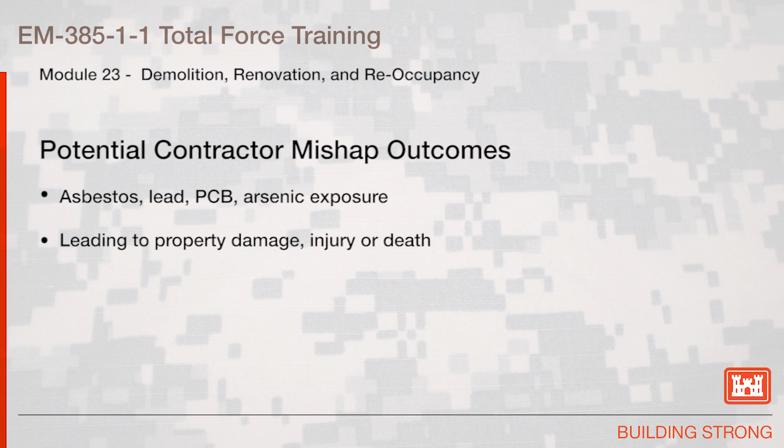Potential contractor mishap outcomes during demolition operations could include fires, explosions, electrical shock, structural collapse, lead, asbestos, PCB, arsenic exposure, all of these leading to property damage, injury, and death.

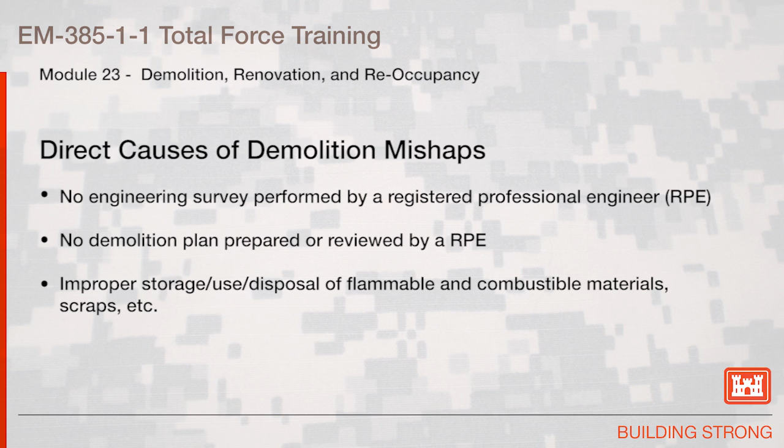Direct causes of demolition mishaps could include no engineering survey performed by a registered professional engineer, no demolition plan prepared or reviewed by a registered professional engineer, improper storage, use, disposal of flammable and combustible materials, scraps, etc. Inadequate type, number, and location of fire extinguishers, welding and cutting near flammables and combustibles.

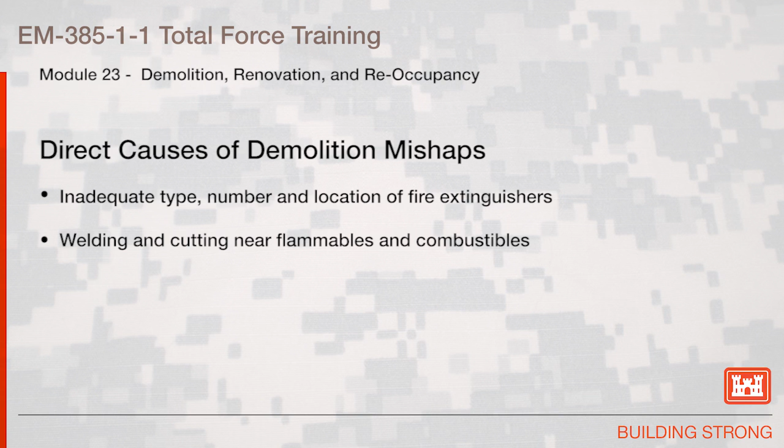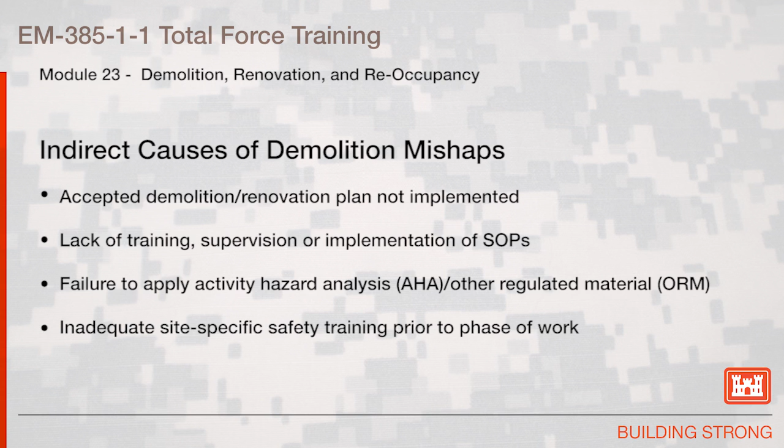Indirect causes of demolition mishaps could include accepted demolition or renovation plan not implemented, lack of training, supervision, or implementation of standard operating procedures, failure to apply activity hazard analysis or operational risk management, inadequate site-specific safety training prior to the phase of work being conducted, regular site safety inspections not being performed, fire extinguishers or other fire protection devices not provided.

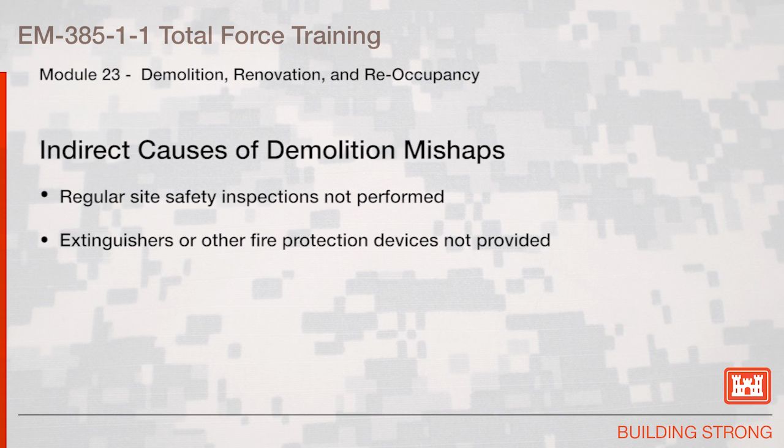Some definitions related to demolition. The process of demolishing or renovating a structure can be completed in several ways. The terms renovation, structural demolition, soft demolition, and mechanical demolition should be understood within the context of this section.

Renovation: the process of remodeling or upgrading an existing structure. This process includes the selective interior demolition and possibly some exterior demolition of a structure as the first step before renovation begins.

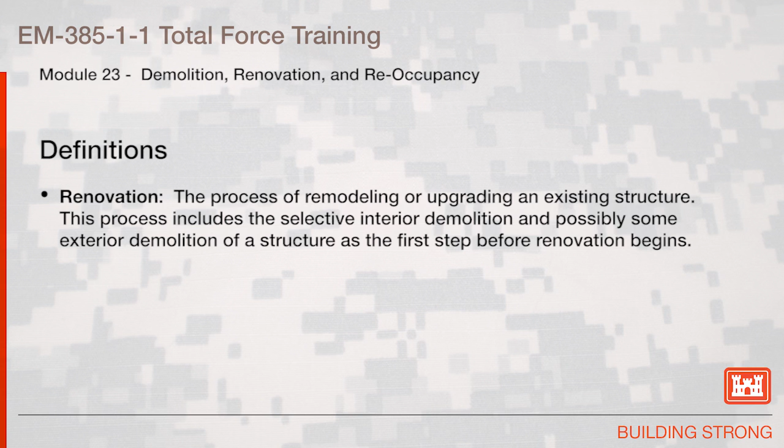Structural demolition: the complete removal of a structure that is not occupied. Structures may include buildings, chimneys, towers, foundations, utilities, bridges, or similar items.

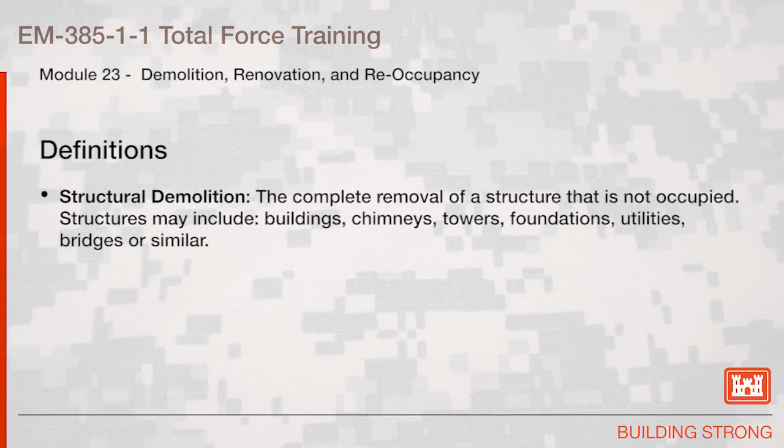Soft demolition: removal of parts or systems of a structure which may include the following: removal of doors, windows, lay-in ceiling tiles, fixtures, interior equipment, lighting, HVAC system components, floor coverings, support systems, and other items deemed appropriate by the state in which the demolition permit is granted. Soft demolition does not include the facility enclosure, curtain walls, roof, slab, or the structural frame.

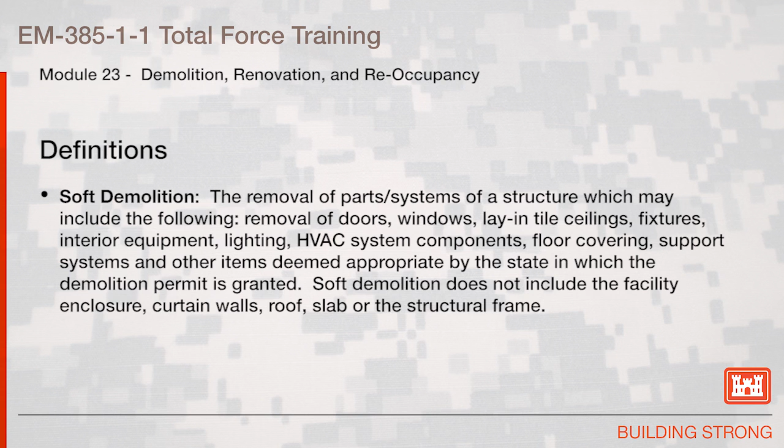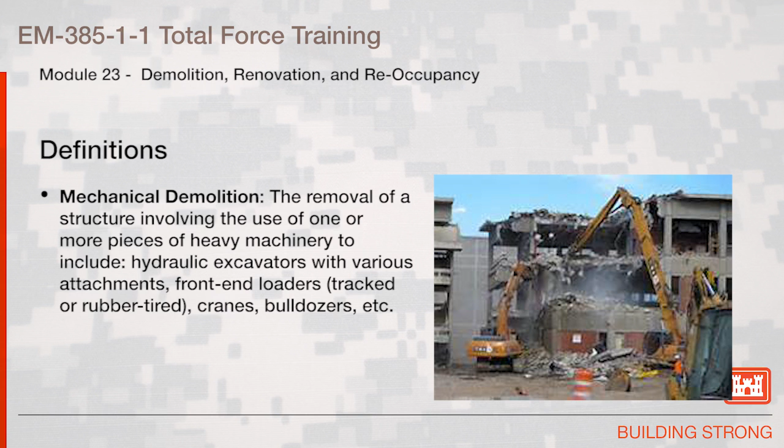Mechanical demolition: removal of structure involving the use of one or more pieces of heavy machinery to include hydraulic excavators with various attachments, front-end loaders, tracked or rubber-tired, cranes, bulldozers, etc.

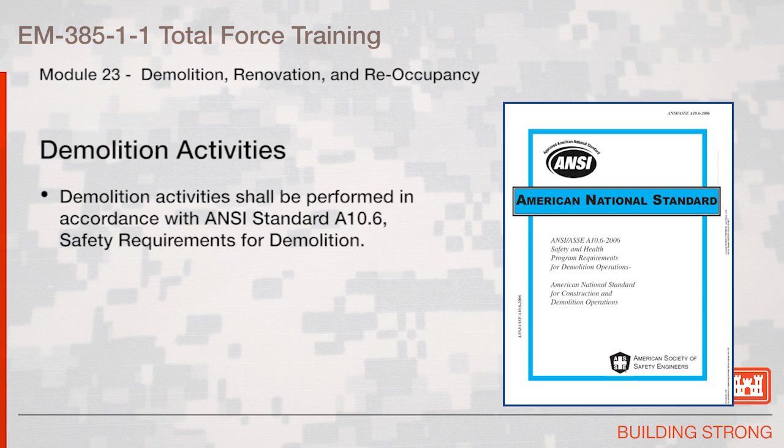Demolition activities shall be performed in accordance with ANSI Standard A10.6, Safety Requirements for Demolition. Demolition Survey: prior to initiating demolition activities, the following survey and plan shall be accomplished.

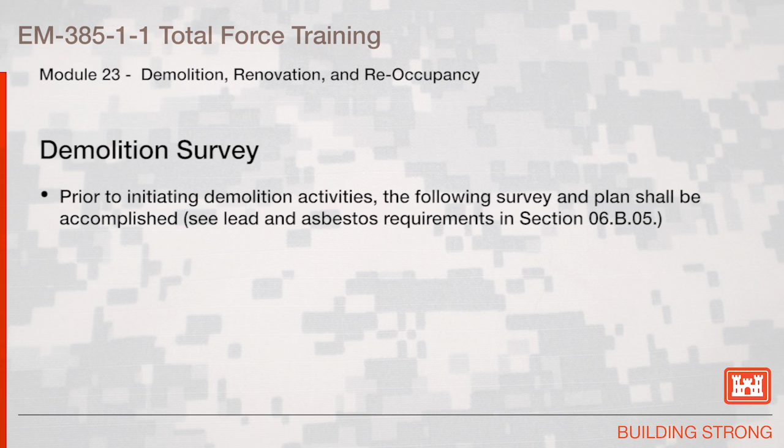See lead and asbestos requirements in section 06.B.05.

Demolition Survey: an engineering survey by a registered professional engineer shall be performed of the structure to determine the structure layout, the condition of the framing, floors, walls, the possibility of unplanned collapse of any portion of the structure. Any adjacent structure where employees or property may be exposed shall be similarly checked, and the existence of other potential or real demolition hazards.

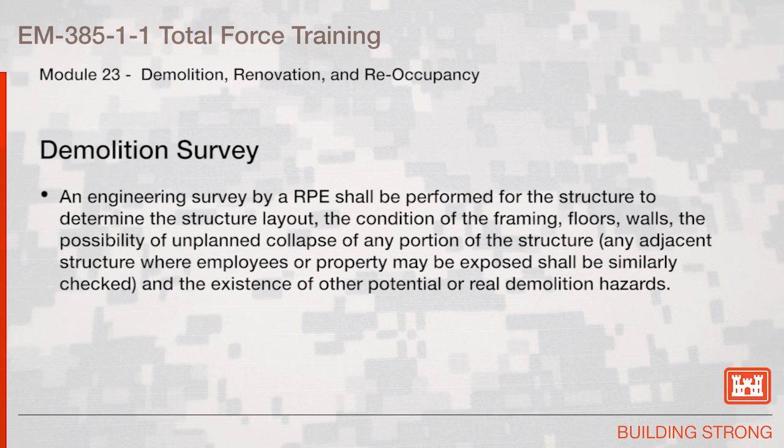The engineering survey is not required for soft demolition or renovation activities as long as no load-bearing structure will be removed or demolished.

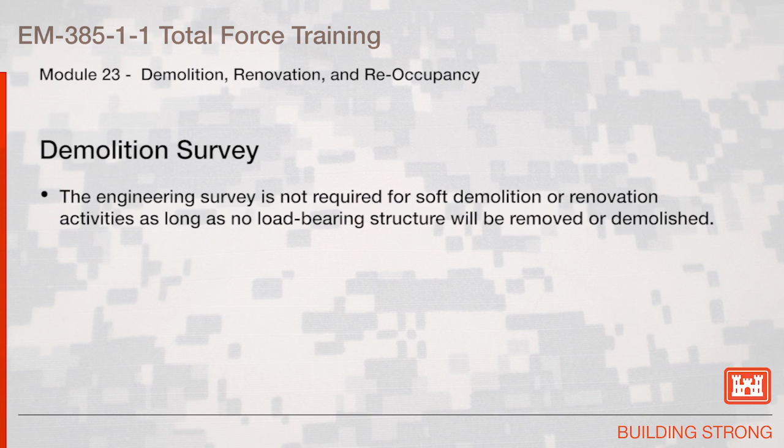Demolition or renovation plan, developed by a registered professional engineer, shall be submitted to the government designated authority. This plan shall be based on the engineering, lead, and asbestos surveys for the safe dismantling and removal of all building components and debris.

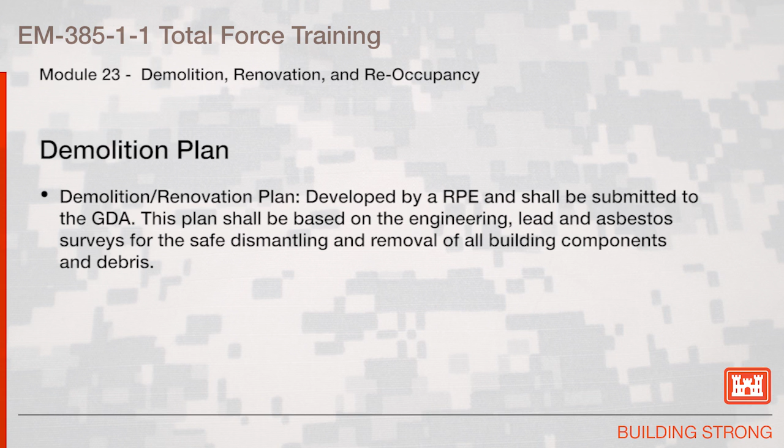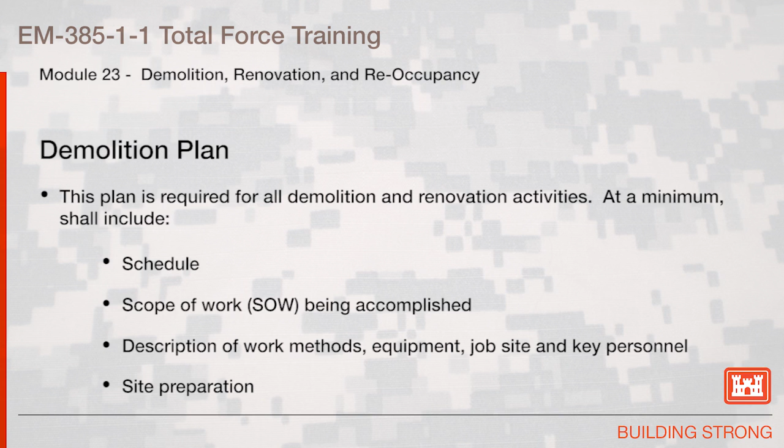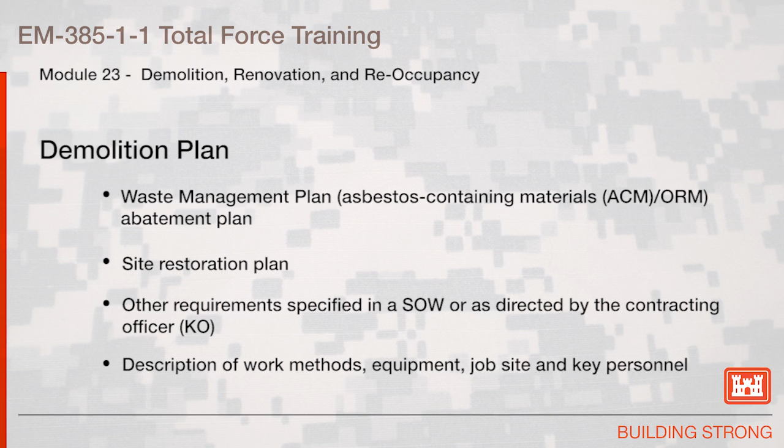This plan is required for all demolition and renovation activities. At a minimum, it shall include the schedule, the scope of work being accomplished, description of work methods, equipment, job site, and key personnel, site preparation, waste management plan, asbestos-containing materials (ACM), other regulated materials (ORM), abatement plan, site restoration plan, and other requirements specified in a statement of work or as directed by the contracting officer.

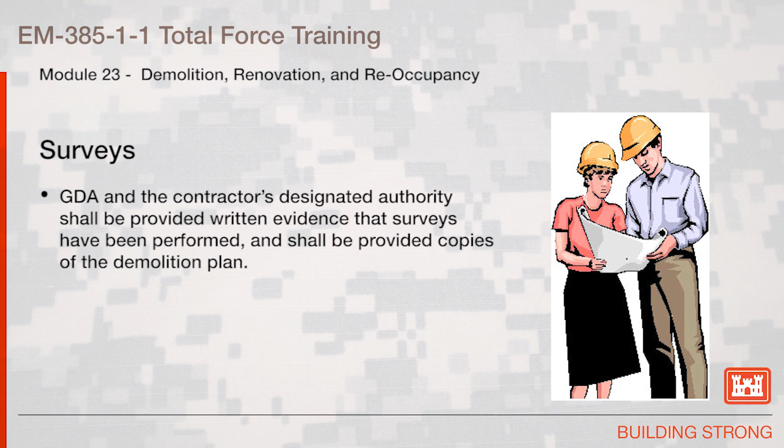Surveys: the government designated authority and the contractor's designated authority shall be provided written evidence that surveys have been performed and shall be provided copies of the demolition plan.

Employee training: all employees engaged in demolition and/or renovation activities shall be instructed in the plan so that they can conduct their work activities in a safe manner.

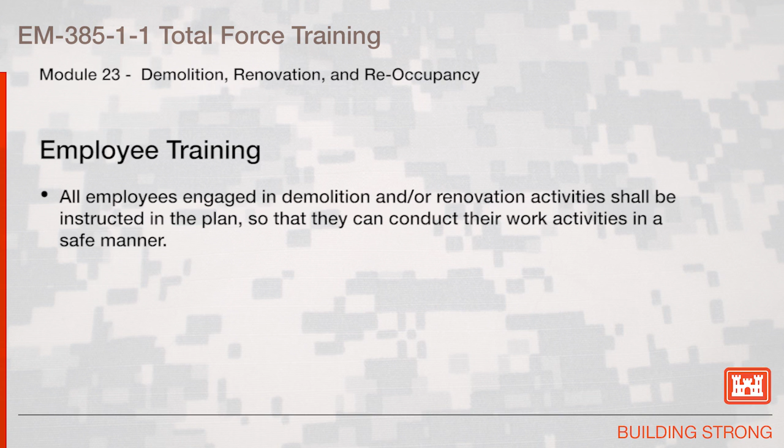Pre-demolition activities: electric, gas, water, steam, sewer, and other service lines affected as a result of the project work shall be shut off, capped, or otherwise controlled inside and outside the building line before demolition is started.

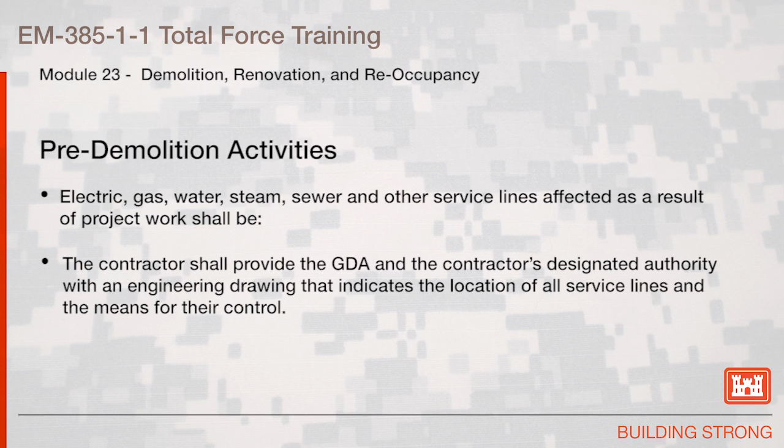Any utility company that is involved shall be notified in advance. The contractor shall provide the GDA and the contractor's designated authority with an engineering drawing that indicates the location of all service lines and the means for their control.

If it is necessary to maintain any power, water, or other utilities during renovation, such lines shall be temporarily relocated and protected.

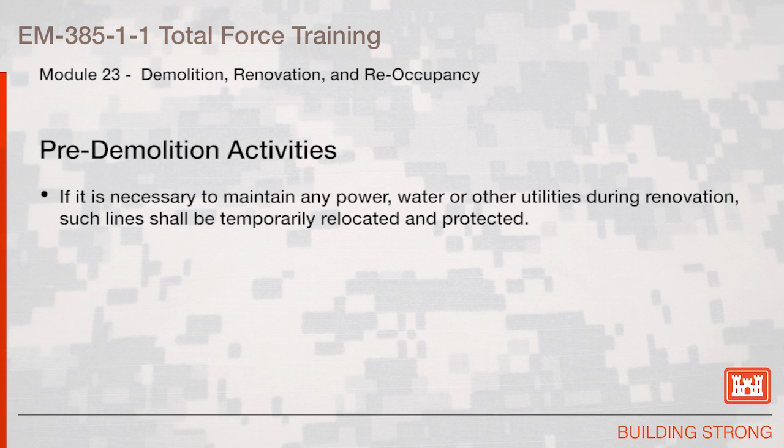It shall be the responsibility of the facility owner to identify and field verify the point or points of disconnection and de-energizing electrical components and electrical service lines.

The contractor must confirm that the disconnection or de-energizing has been performed prior to the start of the demolition process. De-energizing electrical service shall be secured via a lockout method and field verified by the contractor.

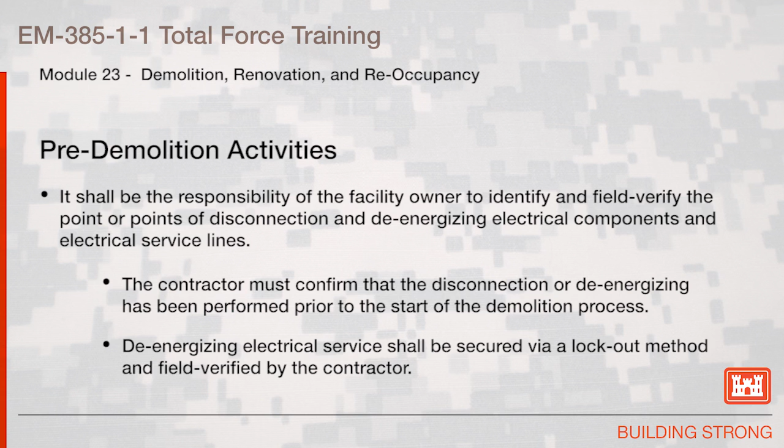If the project includes the abandonment or demolition of existing gas lines, ensure that the existing lines are accurately located and that the procedures and installations for removal or replacement are accomplished in accordance with the applicable sections of 29 CFR 1926.850.

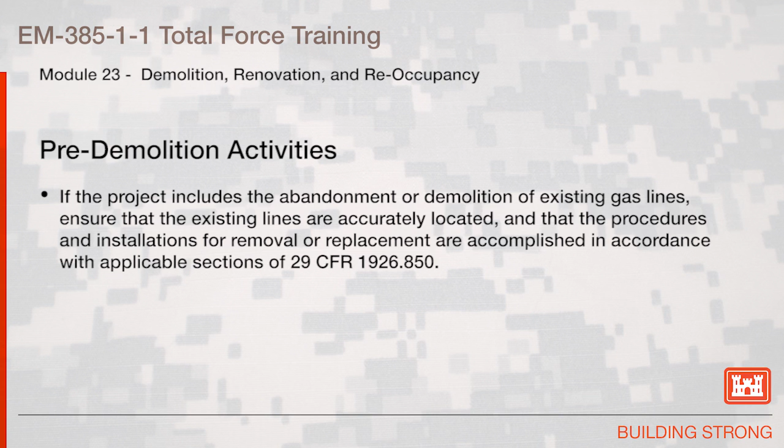If the project includes fire suppression systems, the owner shall provide the GDA confirmation or verification that the chemical fire suppression system has been deactivated and that the chemical has been removed from the system prior to the start of renovation or demolition process.

If the chemical fire suppression system is found to be active after demolition has begun, the contractor shall immediately cease work and notify the government designated authority. The contractor shall take no action to abate or remove the chemical fire suppression system or components.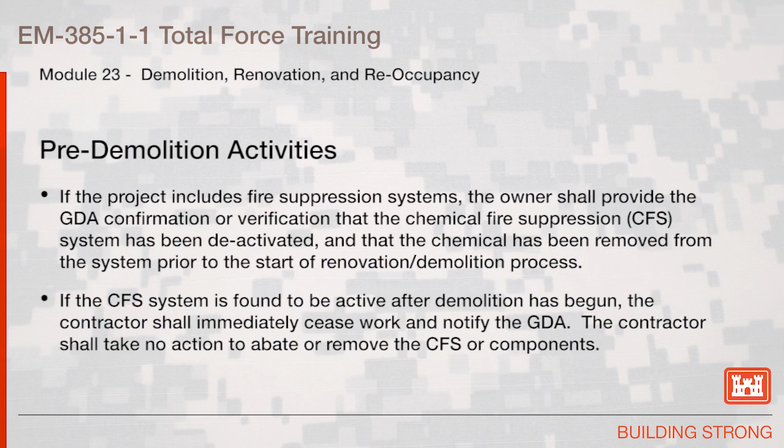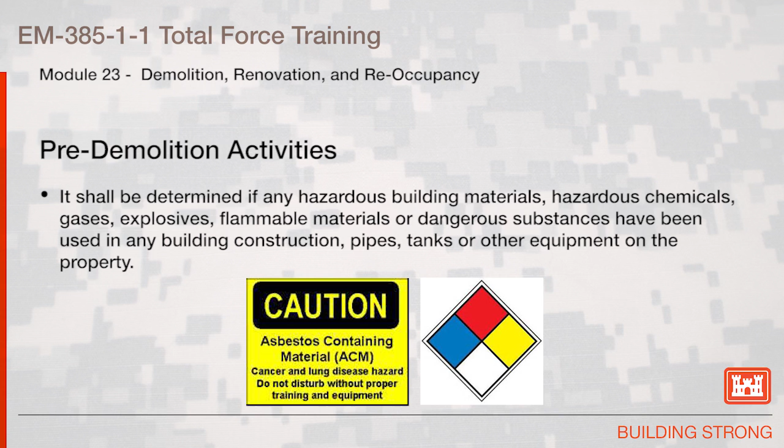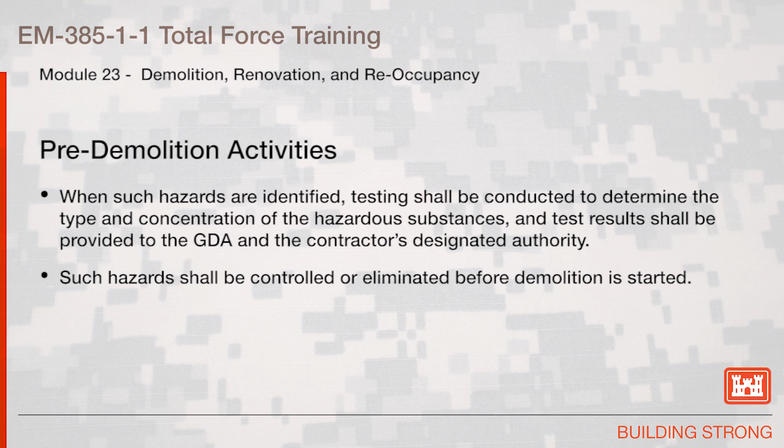It shall be determined if any hazardous building materials, hazardous chemicals, gases, explosives, flammable materials, or dangerous substances have been used in any building construction, pipes, tanks, or other equipment on the property. When such hazards are identified, testing shall be conducted to determine the type and concentration of the hazardous substances, and the test results shall be provided to the GDA and the contractor's designated authority. Such hazards shall be controlled or eliminated before demolition is started.

If hazardous materials or hazmat are found on the project site or location after demolition has begun, the contractor shall immediately cease work and notify the government designated authority. The contractor shall take no action to abate or remove the hazmat without the government designated authority's approval.

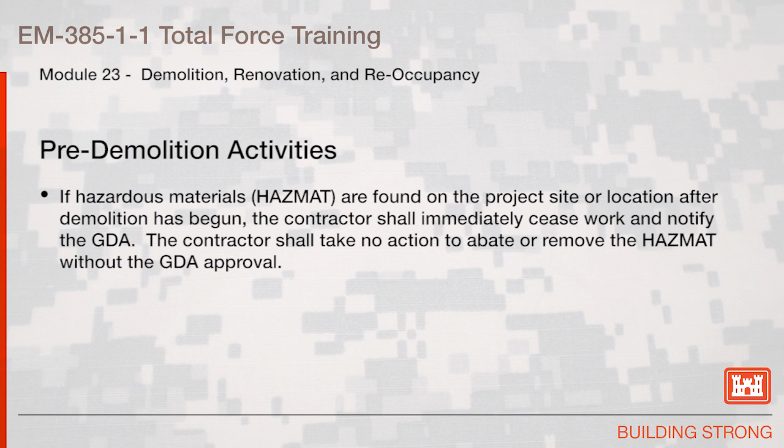All ACM and ORMs shall be removed from structures in accordance with all federal and state laws before renovation or demolition begins. ACM or ORM shall be taken to a controlled landfill or other licensed disposal facility. C and D shall be taken to a general waste landfill, and recyclable materials shall be taken to a recycle yard or retained by the government.

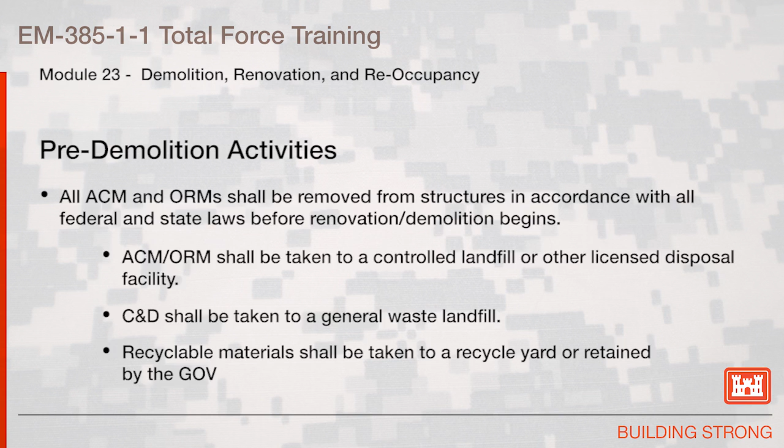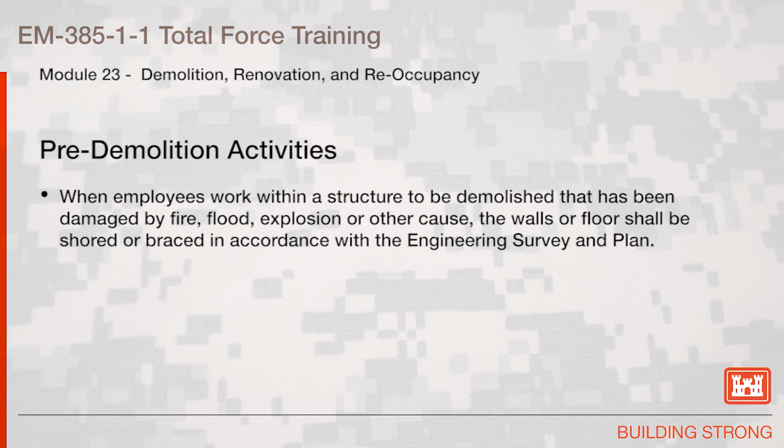When employees work within a structure to be demolished that has been damaged by fire, flood, explosion, or other cause, the walls or floor shall be shored or braced in accordance with the engineering survey and plan. Except for cutting holes in floors for chutes, holes through which to drop materials, preparation of storage spaces, and similar preparatory work, demolition of floors and exterior walls shall begin at the top of the structure and proceed downward.

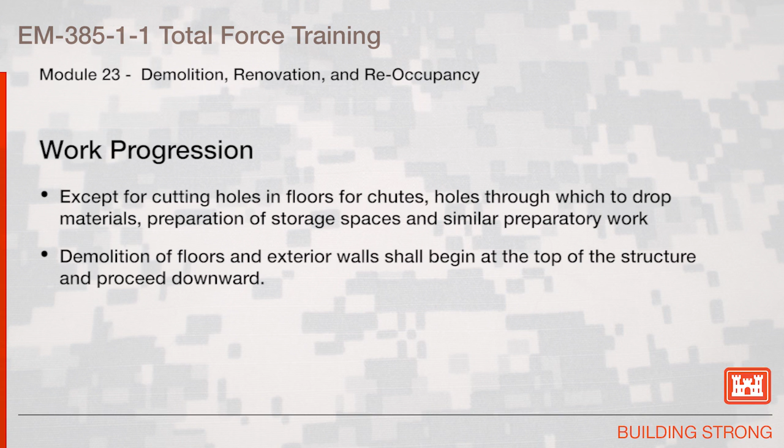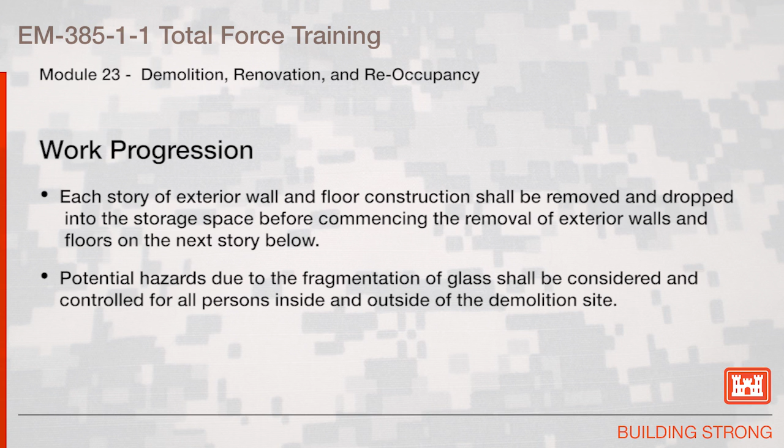Each story of exterior wall and floor construction shall be removed and dropped into the storage space before commencing the removal of exterior walls and floors on the next story below. Potential hazards due to the fragmentation of glass shall be considered and controlled for all persons inside and outside the demolition site.

Mechanical equipment shall not be used on floors or working surfaces unless such floors or surfaces are of sufficient strength to support the imposed load.

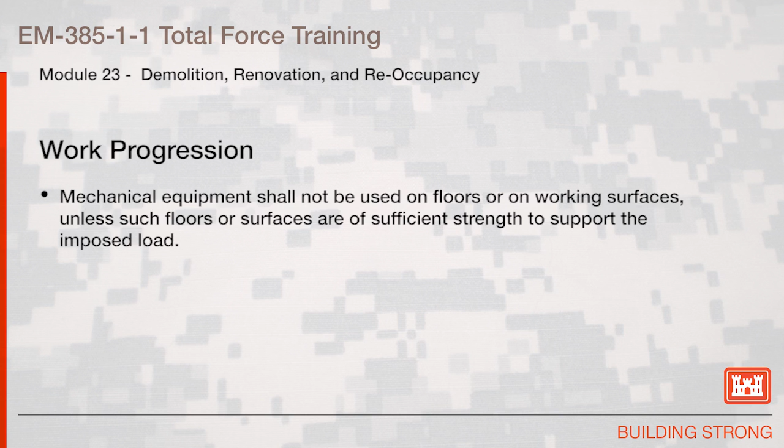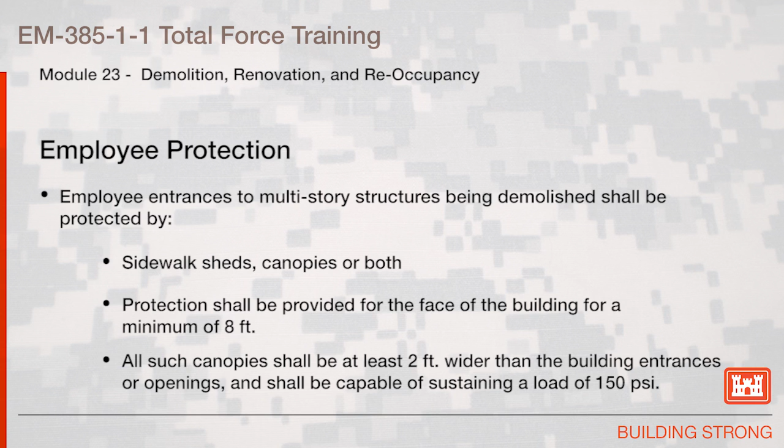Employee protection. Employee entrances to multi-story structures being demolished shall be protected by sidewalk sheds, canopies, or both. Protection shall be provided from the face of the building for a minimum of 8 feet. All such canopies shall be at least 2 feet wider than the building entrances or openings and shall be capable of sustaining a load of 150 pounds per square foot.

Only those stairways, passageways, and ladders designated as a means of access to the structure shall be used. They shall be indicated on the demolition plan. Stairwells shall be covered to protect workers from falling debris at a point no less than 2 floors below the floor on which work is being performed. Access to a floor where work is in progress shall be through a separate, lighted, protected passageway.

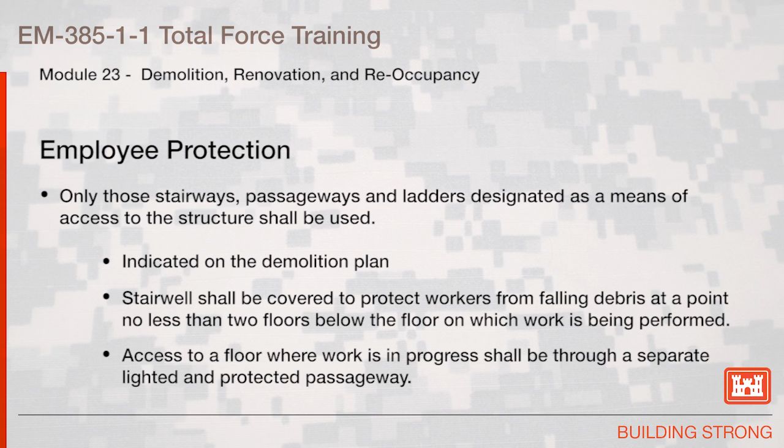Work progression. During demolition, continuing inspections by the competent person shall detect hazards resulting from weakened or deteriorated floors, walls, or loosened material. No employee shall be permitted to work where such hazards exist until they are corrected by shoring, bracing, or other means. The frequency of inspection shall be identified in the blasting or renovation plan.

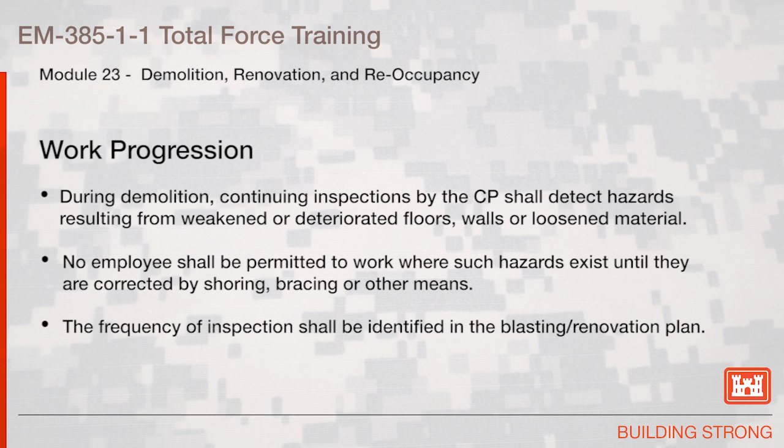Walls or sections of masonry shall not be permitted to fall upon floors of the building in such masses as to exceed the safe carrying capacity of the floor.

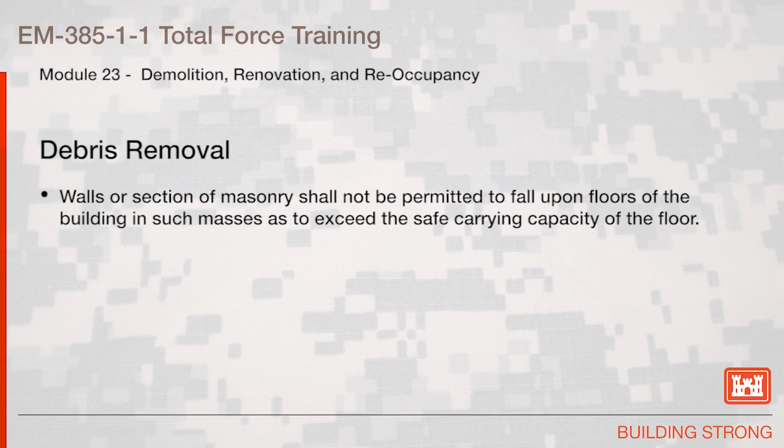Any chute opening into which debris is dumped shall be protected by a guardrail 42 inches above the floor or other surface on which personnel stand to dump the material. Any space between the chute and edge openings in the floor through which it passes shall be covered.

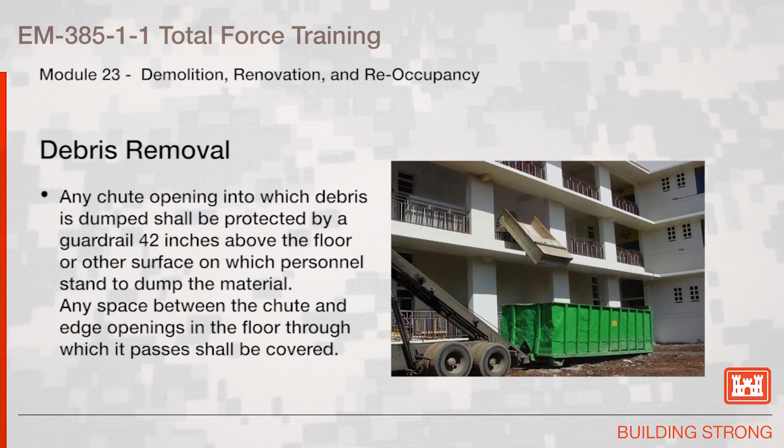When debris is dropped through openings without chutes, the openings and the area onto which the material is dropped shall be enclosed with barricades not less than 42 inches high and not less than 6 feet from the projected edge of the opening above. Signs warning of falling material shall be posted on each floor. Debris removal shall not be permitted in lower areas until debris handling ceases on the floors above.

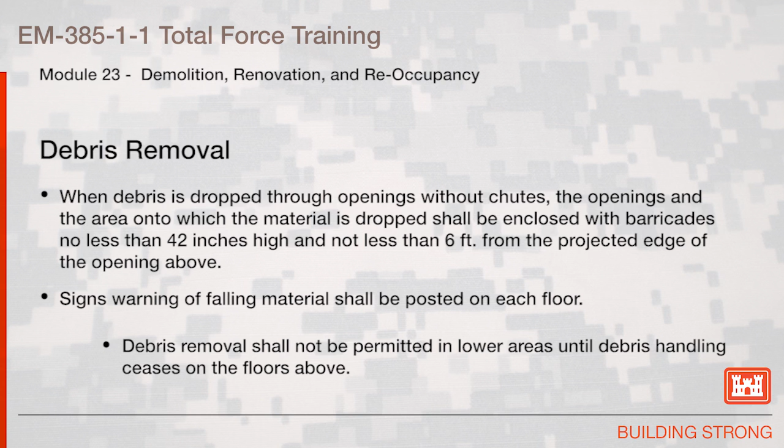All material chutes or sections thereof at an angle of more than 45 degrees from the horizontal shall be enclosed, except for openings equipped with closures at or about the floor level for the insertion of materials. Openings shall not exceed 48 inches in height measured along the wall of the chute. Openings shall be kept closed at all floors below the top floor when not in use.

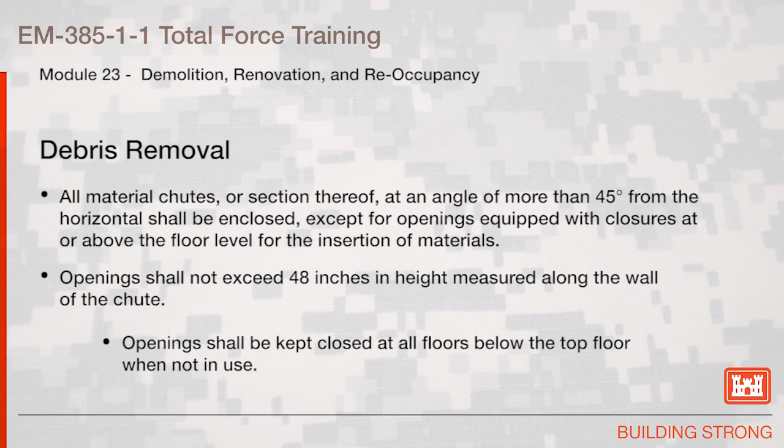A substantial gate shall be installed at each chute at or near the discharge end. A competent employee shall be assigned to control operations of the gate and the backing and loading of trucks. When operations are not in progress, the area surrounding the discharge end of the chute shall be closed.

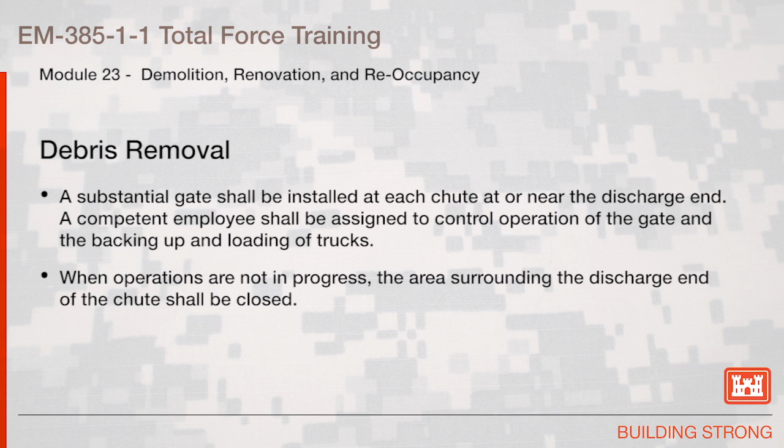Where material is dumped from mechanical equipment or wheelbarrows, a toeboard or bumper not less than 4 inches thick and 6 inches high shall be attached to each chute opening. Chutes shall be designed and constructed of such strength as to eliminate failure due to impact of materials or debris loaded therein. The storage of waste and debris on any floor shall not exceed the allowable floor loads.

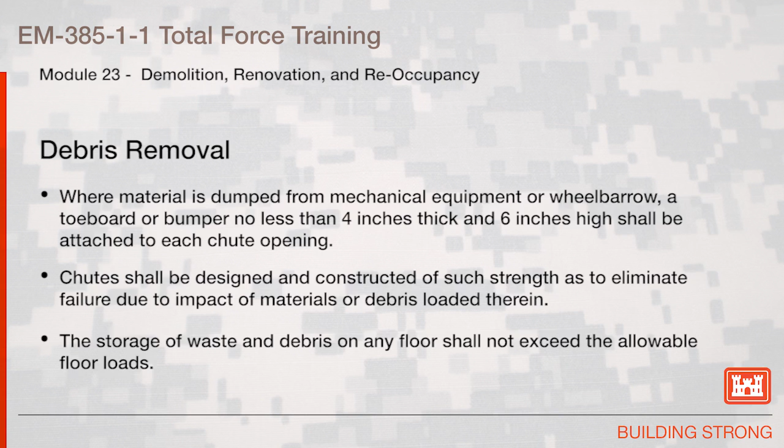In buildings having wood floor construction, the floor joists may be removed from not more than 1 floor above grade to provide storage space for debris, providing falling material is not permitted to endanger the stability of the structure.

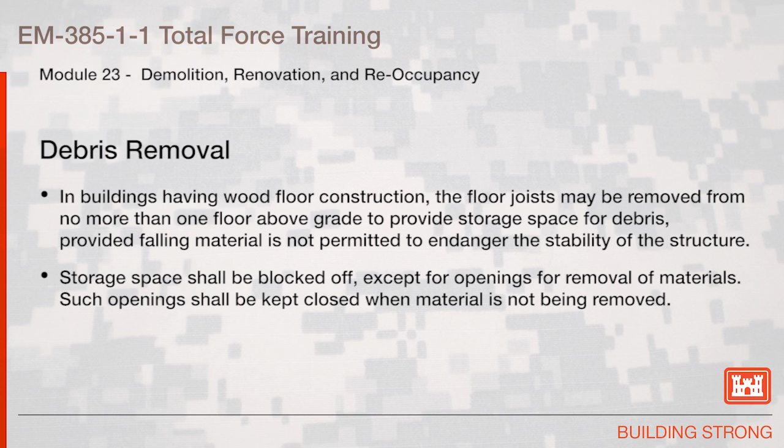Storage space shall be blocked off, except for openings for the removal of materials. Such openings shall be kept closed when material is not being removed.

Floor openings shall have curbs or stop logs to prevent equipment from running over the edge. Any opening cut in a floor shall not be larger in size than 25% of the total floor area, unless lateral supports of the removed floor remain in place.

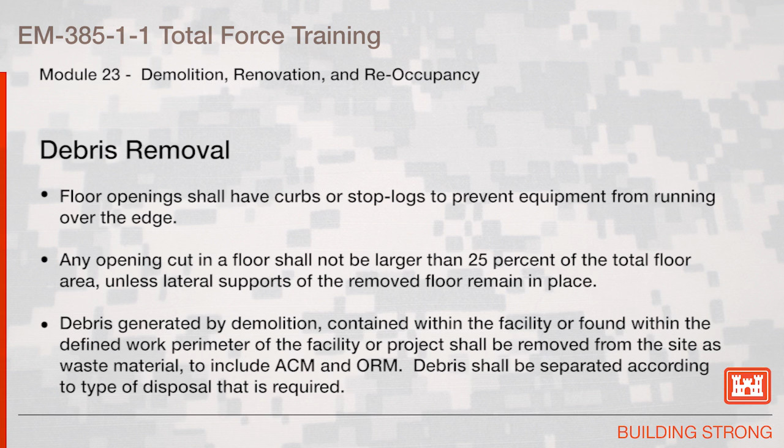Debris generated by demolition or contained within the facility or found within the defined work perimeter of the facility or project shall be removed from the site as waste material, to include ACM and ORM. Debris shall be separated according to type of disposal that is required.

The disposal site shall be approved by the GDA prior to the notice to proceed. Contractor shall provide the GDA documentation that confirms the disposal location, the type of debris, and the quantities of each type.

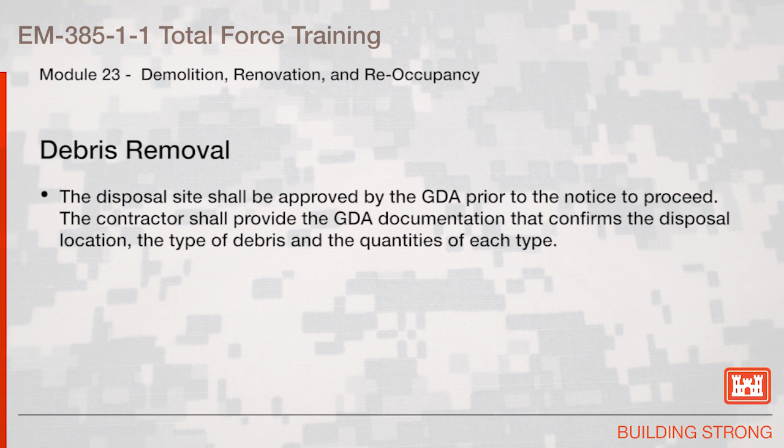Wall removal. Masonry walls shall not be permitted to fall upon the floors of buildings as to exceed the safe carrying capacities. No wall section greater than 6 feet in height shall be permitted to stand without lateral bracing. Exception: for wall sections that are designed and constructed to stand without lateral support, an exception may be allowed.

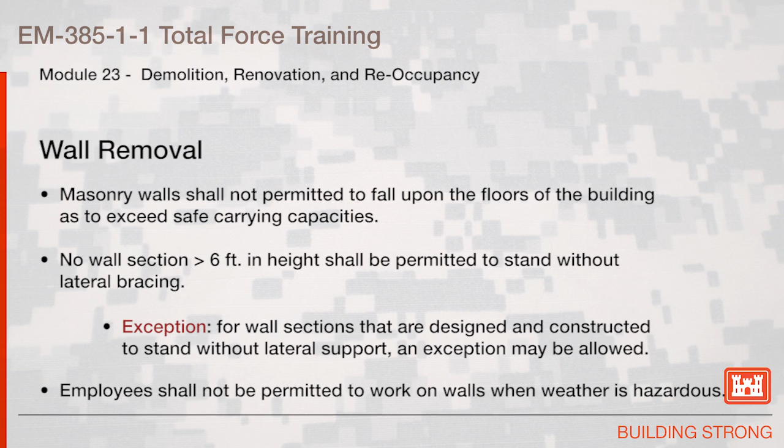Employees shall not be permitted to work on walls when weather is a hazard. Floor openings within 10 feet of any wall being demolished shall be planked solid, except when employees are kept out of the area below. In buildings of skeleton steel construction, the steel framing may be left in place.

During the demolition of masonry, all steel beams, girders, and structural supports shall be cleared of all loose material. Masonry demolition progresses downward.

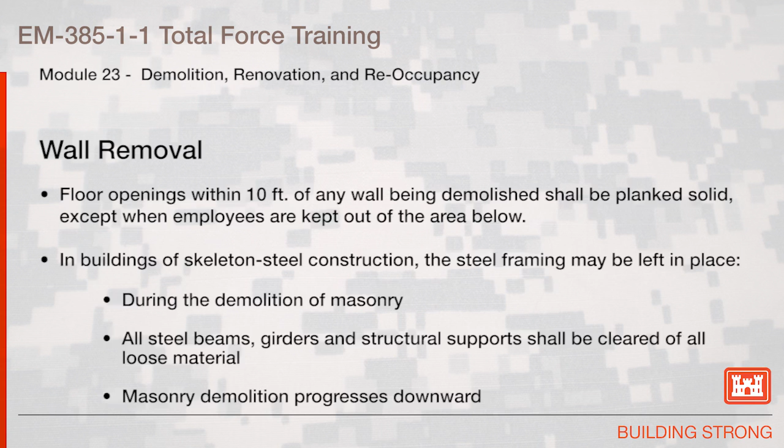Walls that serve as retaining walls to support earth or adjoining structures shall not be demolished until such earth has been braced or adjoining structures have been underpinned. Walls shall not be used to retain debris unless capable of safely supporting the imposed load.

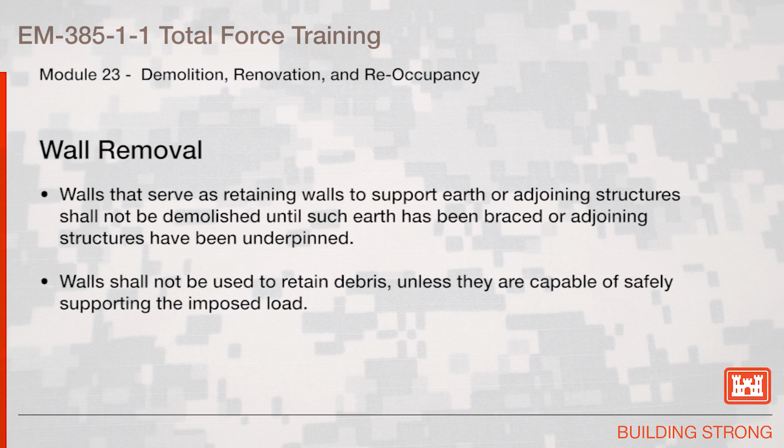Floor removal. Before demolishing any floor, debris and other material shall be removed from the immediate work location and other adjacent floor areas. Safety walkways, not less than 18 inches wide, shall be provided and used by personnel when necessary to enable them to reach any point without walking upon exposed beams.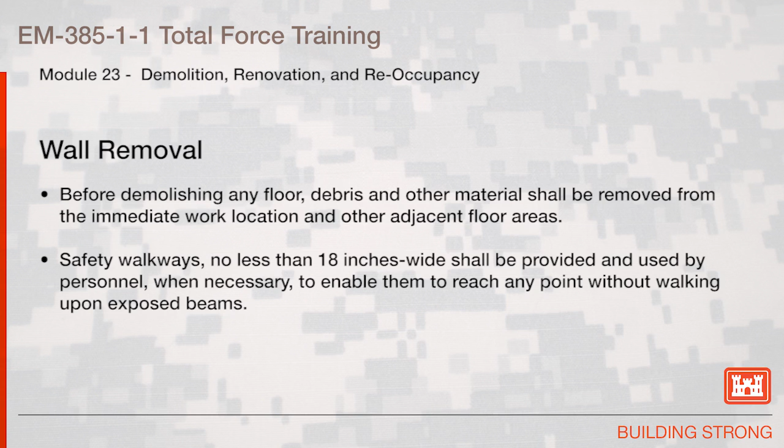When floors are being removed, employees shall not be allowed in the area directly underneath. The area shall be barricaded and signed to warn of the hazard.

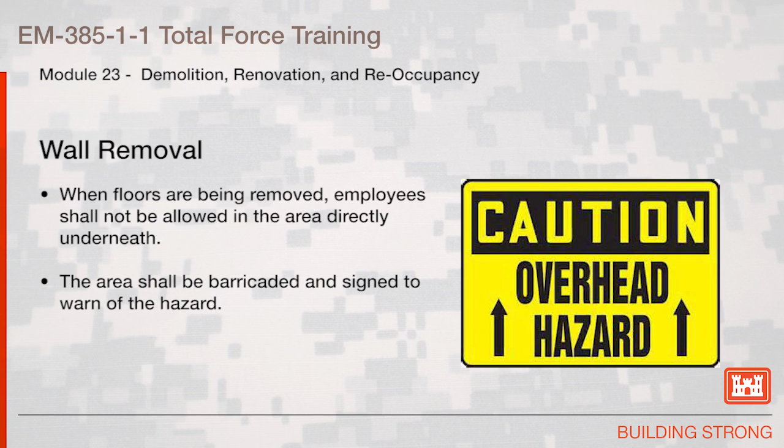Steel removal. When a floor or any portion of the floor has been removed, planking shall be provided for the workers razing or dismantling the steel framing. Steel construction shall be dismantled column by column and tier by tier. Columns may be 2 stories lengths.

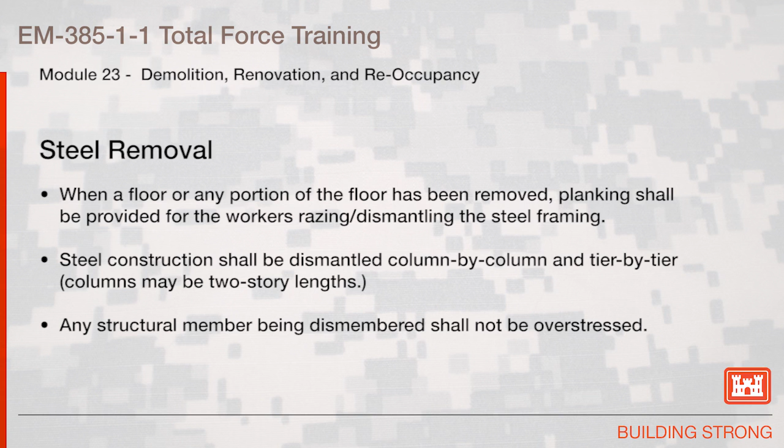Any structural member being dismembered shall not be overstressed.

Structural demolition. Removal of a facility may include the structure as well as any related appurtenances. Fences, parking areas, and associated lights, roadways, and access from roadways, sidewalks, and stairs associated with access, pads, patios, and paved laydown areas, utilities, underground storage tanks, above-ground storage tanks, poles, interior and exterior equipment associated with the facility, interior and exterior equipment within the designated perimeter of the facility.

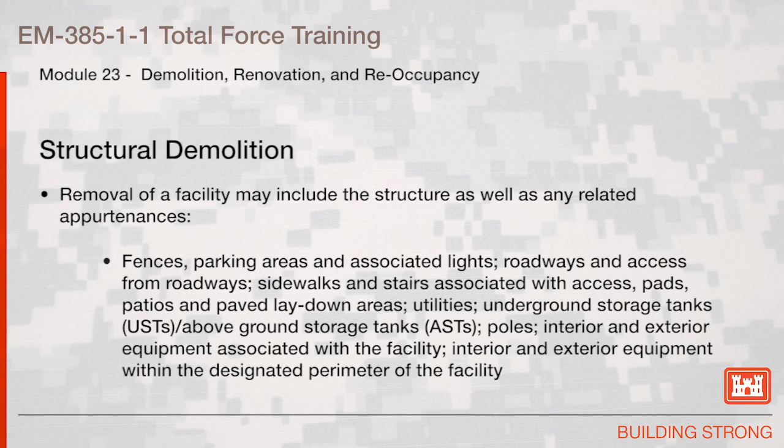All operations involving the use of load handling equipment shall meet Section 16 to include certificate of compliance, documented personnel qualifications, operators, riggers, signal persons, etc., load handling inspections, operational and load tests and certifications, and standard lift plan. If the manufacturer of the equipment does not allow the equipment to be utilized as planned, you are prohibited from performing this function.

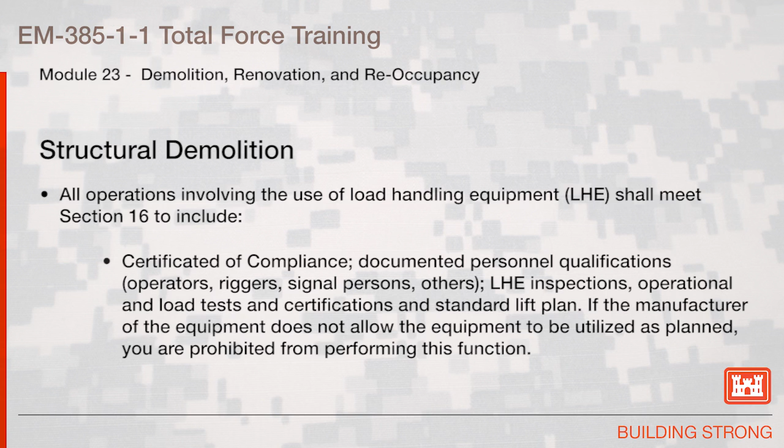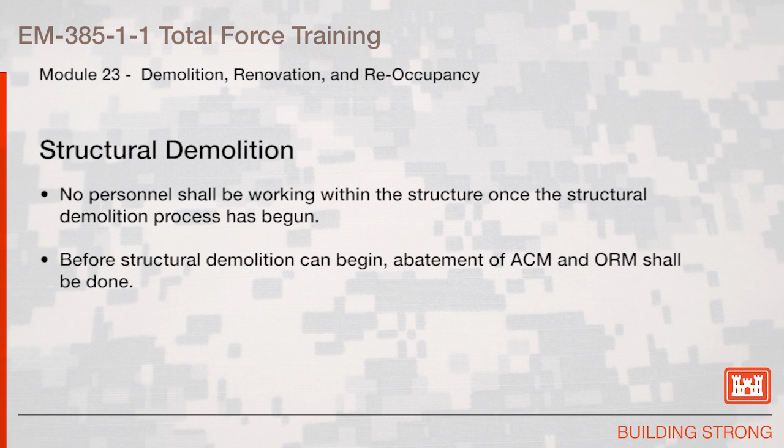No personnel shall be working within the structure once the structural demolition process has begun. Before structural demolition can begin, abatement of ACM and ORM shall be done.

Structural demolition may include any or all of these features prior to demolition: removal of universal waste prior to the start of facility removal, partial demolition to expose the structure frame, soft demolition.

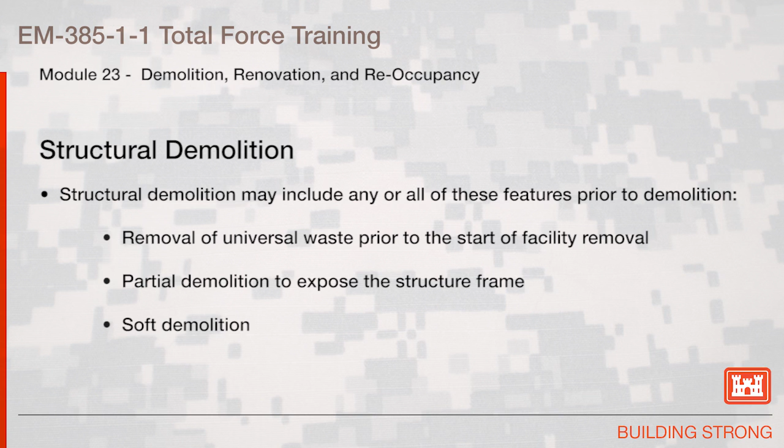Mechanical demolition. All motorized equipment used on a project shall meet requirements of EM 385-1-1, as well as applicable OSHA requirements. In addition, see the National Demolition Association's Demolition Safety Manual, Chapter 7.

No person shall be permitted in any area that can be affected by demolition when mechanical demolition is being performed. Only those persons necessary for the operations shall be permitted in the area. Dust abatement measures will be used to suppress dust during demolition. Operators are required to wear respirators, per Section 5.

A demolition ball may be used only if it has been approved by the government designated authority. If the use of a demolition ball is approved, weight of the demolition ball shall not exceed 50% of the crane's rated load based on length of the boom and maximum angle of operation at which the demolition ball will be used. Or, it shall not exceed 25% of the nominal breaking strength of the line which it is suspended from.

The crane boom and load line shall be as short as possible. The ball shall be attached to the load line with a swivel connection and be attached by positive means so that the weight cannot accidentally disconnect.

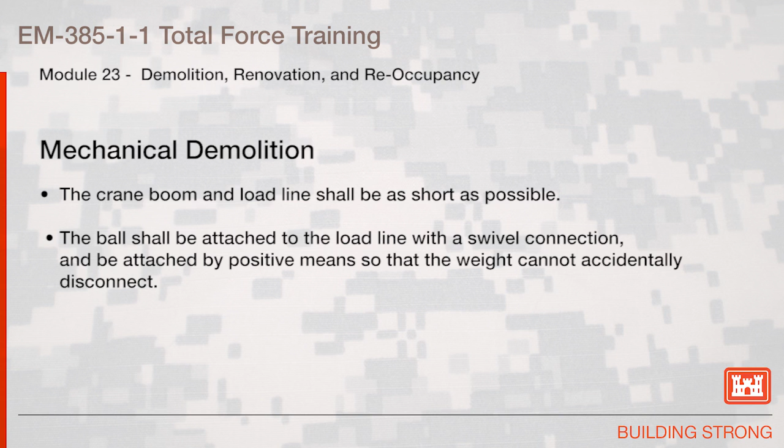Continued ongoing inspections by the competent person shall be made as the demolition work progresses to detect hazards resulting from weakened or deteriorated floors or walls or loosened materials. No employee shall be permitted to work where such hazards exist until they are corrected by shoring, bracing, or other effective means.